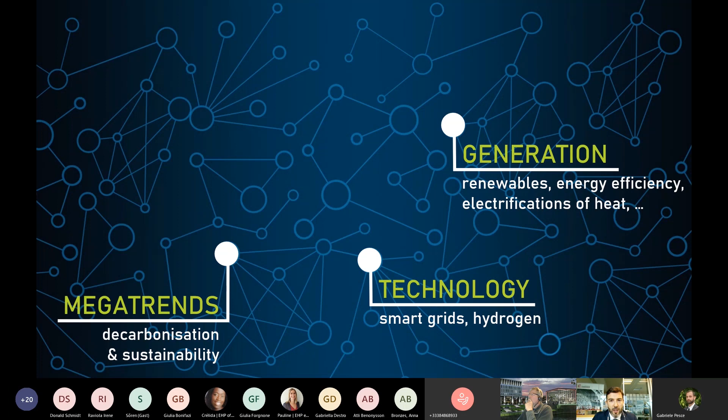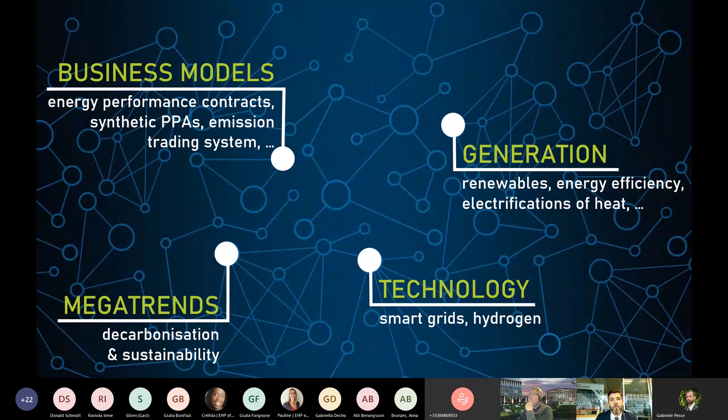We are also looking at changes in business models, which are now different from the past. We have energy performance contracts that are more and more common in the industry, with ESCO companies playing an important role. We are seeing synthetic PPAs. There is the emission trading system that is making energy efficiency attractive or needed in some cases. We are also seeing changes in finance and the way of funding projects around Europe. The European Green Deal is a big opportunity to receive funding from the European Union, but finance in general is changing in the energy sector. More and more funds and financial institutions are deciding to invest in the green economy, and so also in the green generation of power and heat. And the latest technologies like blockchain, fintech in general, are taking a role also in energy, for example with the tokenization of real assets related to the production of electricity or heat.

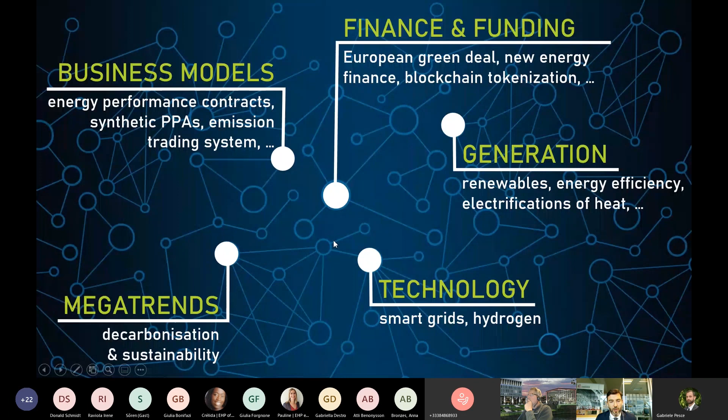In all this context, which is complicated, all these factors are in some way interrelated. We, as a technology provider, see technological innovation as a key enabler of all what is happening, so of this revolution in essence.

This situation is opening up huge opportunities for all the stakeholders in the sector: for the producers of energy, for the users, who are receiving more competitive energy in terms of cost but also additional benefits in terms of sustainability of the electricity and heat they are using, and also for the providers of technology.

Going directly into one of the topics of my presentation, I want to mention that if we look only at the potential market for large heat pumps, we see an addressable potential of 25 gigawatts, so 25,000 megawatts thermal of installable equipment, which is a huge amount only related to Europe.

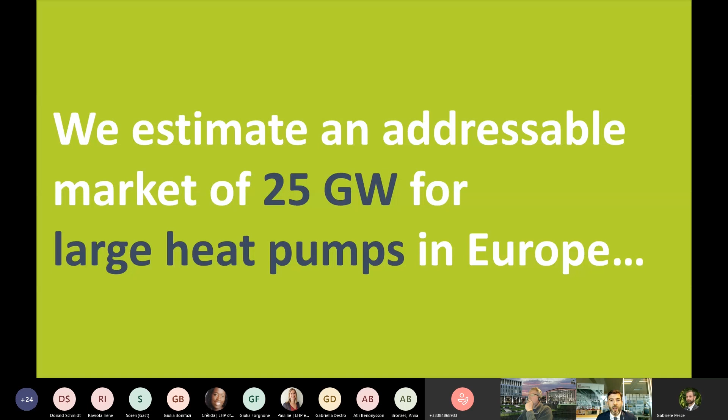As you can see, this potential is spread across many countries in Europe. There is a very interesting potential in Germany, but also Italy, Sweden, France, Finland, Austria, and Denmark, and then Portugal and Switzerland will be interested in the adoption of this new technology as a way to produce clean heat.

The interesting point is that as of today, only 5% of this important market is already exploited. This is just an example of how a new technology can respond to a need, the need to produce clean heat, and how many things we still have to do in the sector.

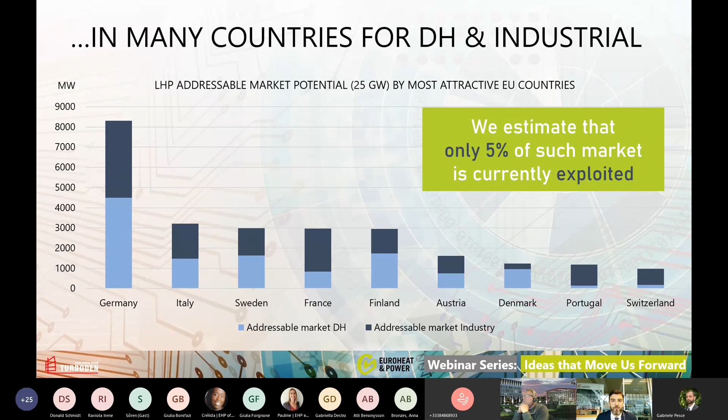Just a few words about who we are. Turboden is an Italian company, but it's a group company of Mitsubishi Heavy Industries from Japan.

2020 is our 40th birthday. This company has always been focused on the development of a single technology, which is the organic Rankine cycle system, which is a type of generation system for electricity and heat very suitable for distributed generation, which is also another trend, getting more and more importance in the latest years.

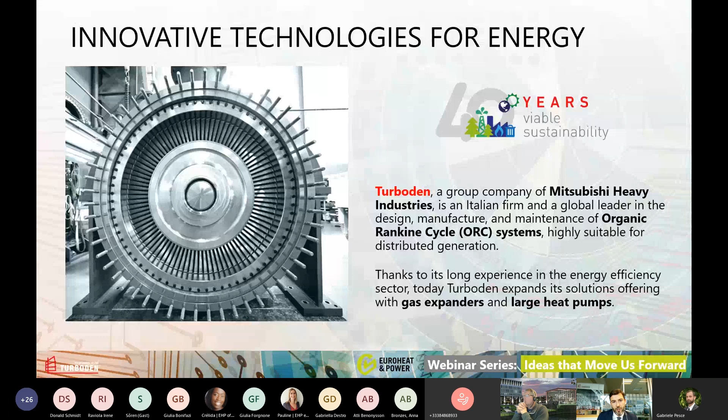In addition to the organic Rankine cycle, we recently started, in the last 3-4 years, to develop other products, including the large heat pumps that I mentioned before, and also the gas expanders that I will mention at the end of the presentation.

A few words about the organic Rankine cycle. The organic Rankine cycle system is basically a turbo generator where a Rankine cycle is implemented, but instead of using water, which is the typical means adopted for Rankine cycles, we are using different fluids. Specifically, we are using organic fluids, for example hydrocarbons or refrigerants.

The interesting point of this system is that it's very flexible and can provide some advantages compared to the traditional Rankine technology running on steam. One of the key points is that it can be used to recover heat also at low temperature, which is not possible with other technologies.

In terms of size, as I said, these systems are very suitable for distributed generation, so the size is fairly small. Our units are typically in the range from a few hundred kilowatts up to 40 megawatts per single unit, which is starting to be quite large, actually.

Large heat pumps: this is another technology that we are now proposing to the market, and it's a natural evolution of what we have been doing for the last 40 years, because if you look at the technology of a large heat pump, it is a kind of organic Rankine cycle reversed, where instead of a turbine expanding a fluid, you have a compressor compressing a fluid, and the fluids are similar. The heat pumps can be used to lift heat from a low-grade source to a higher-grade user, and the users can typically be district heating networks or industrial processes, by means of exploitation of electrical power.

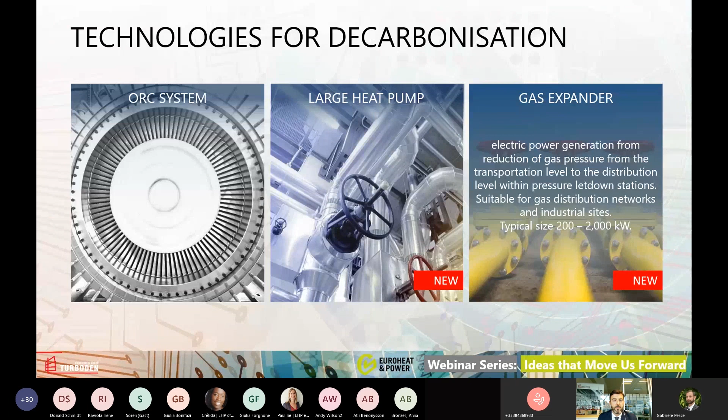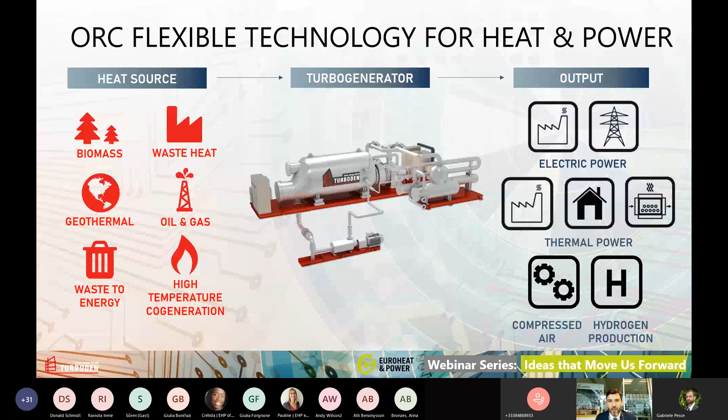As output, you can have different types of outputs. You can just produce electricity, or work in cogeneration mode, producing electricity and heat, which can be sent to different types of users in the form of water, hot water, or steam. You can even use the system to generate mechanical energy, for example in the form of compressed air, which is an application we've installed in some industrial sites. Or, as a new feature, you could use the system to run an electrolyzer to produce hydrogen, which may be a new frontier we'll develop more in the future.

Just to give you an idea, there are many ORC systems deployed around the world. This is a snapshot of the Turboden fleet. Most of our plants are running on biomass, with an ORC recovering the heat from combustion. We have about 450 megawatts installed, most of those in Europe.

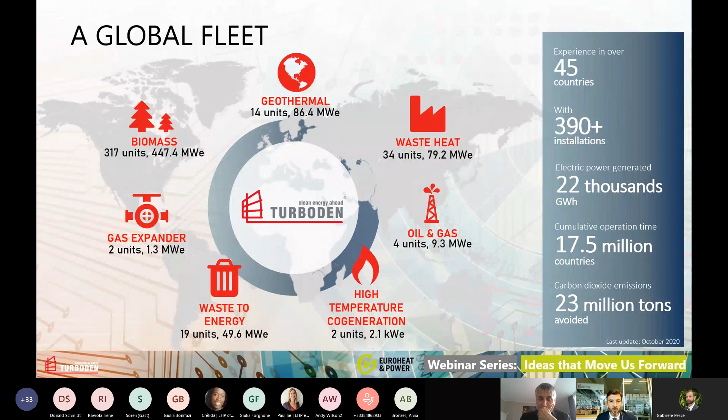Then we have geothermal, which is also quite interesting, where you can generate electricity or do cogeneration, as happens in Germany, for example. We have a waste heat recovery plant, roughly a bit less than 100 megawatts, in industrial processes including oil and gas. We have a couple of high temperature cogeneration systems already deployed, and other applications. Overall, we have roughly 400 plants around the world, producing roughly 22,000 gigawatt hours of clean electricity, so we are in some way contributing to the decarbonization of the world with our technology.

Just some examples, mainly related to district heating.

The first example is about Bavaria, the southern region of Germany, where we have a number of plants - 21 plants connected to district heating, most of them biomass plants. Some, as you can see on the left of the slide, are geothermal plants. We have 4 geothermal plants generating power and heat, connected to the local grid for electricity and to the local district heating for the heat. Then we have 2 plants just producing electricity. Average size of the plants is in the range of 4 or 5 megawatts. Overall, we produce 25 megawatts thermal with geothermal source and 27 megawatts electricity.

Most of these plants are owned by the local utilities, and as you can see on the right, many plants are deployed around the region. I think this is a very interesting example of integration of electricity and heat using new and clean technologies to provide electricity and heat to local communities.

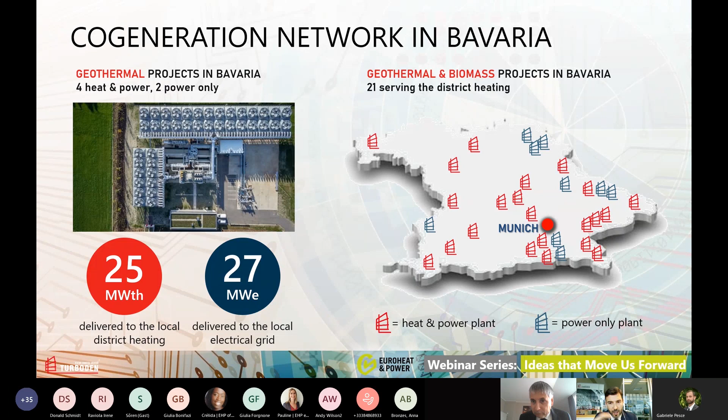This is another example of an interesting application, which in my opinion will become more and more popular in the future in Europe, but also outside Europe.

On the left, you see one of our references, which is basically an ORC unit producing roughly 1.2 megawatts, from the recovering of heat coming from the combustion of dried sludge, taken from a wastewater treatment system. This is an interesting way to increase the efficiency of water treatment systems, producing some electricity by using a residue, the dried sludge.

On the right, we see another example. This is not a reference, but just a case study, where instead of using an ORC to produce electricity, we are thinking about exploiting the residual heat coming out from the water treatment system with a heat pump in order to lift the heat and feed a district heating network.

Actually, this is not a new idea. There are a number of plants like this deployed around Europe. We saw statistics showing there are 54 plants producing 900 megawatts thermal. I think this may become a trend in the future, because it's a very good idea to exploit this waste heat in order to produce usable heat for local communities by means of a very efficient system like the large heat pump.

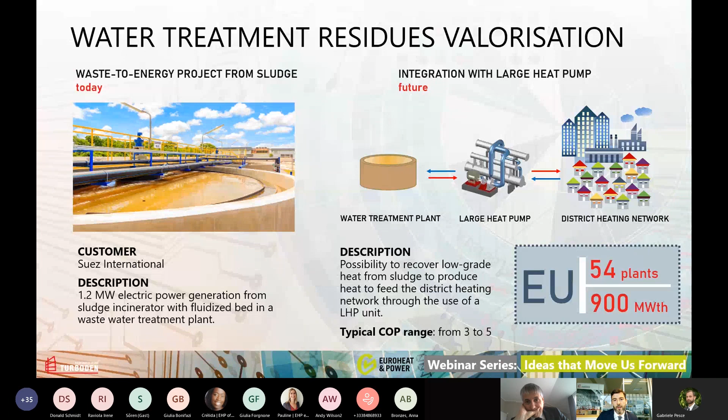This is another example of an organic rankine cycle system integrated with the district heating network. This is a waste incinerator burning municipal solid waste in Belgium, and this incinerator was meant to produce heat to feed the local district heating. As you can see here, there are some users indicated in the picture.

In parallel to the district heating, which was already in operation, we were asked by the owner of the incinerator to install an ORC system, which has been recovering excess heat in the district heating for almost 10 years. So when the load of the district heating is lower and excess heat is available from the operation of the incinerator, our ORC system recovers this heat in order to produce some electricity. Here we are working at high temperature for district heating, 180 degrees C, but low temperature for heat recovery, which is possible only thanks to the characteristics of the ORC system.

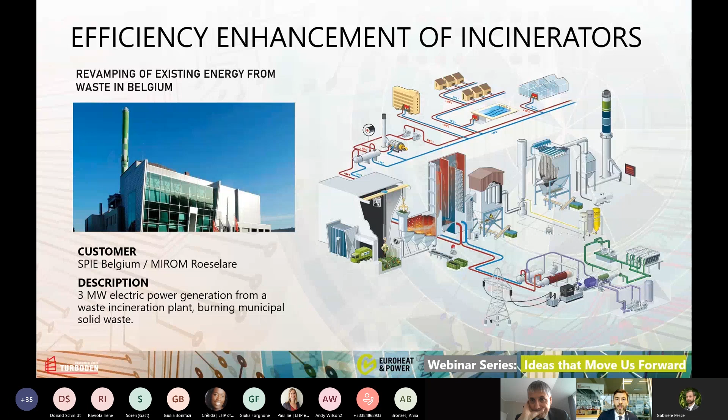Just to give an overall idea of how cogeneration serving district heating is spread in Europe, we put this chart where we show how our plants are distributed in the different countries. We see that we have a lot of plants in Germany and Italy, a good number in Austria, then we have UK, Poland, Latvia, and this is not exhaustive. We have also plants in other countries.

Overall, we have 274 CHP plants, 97% of those fed by biomass, and we are producing over 1.2 gigawatts thermal, of which roughly 700 are delivered to local district heatings. In addition to that, we are producing 300 megawatts of electricity. So I think that Europe is already on the right path towards decarbonization, and all the examples I'm giving are good examples that could be even further replicated.

Let's go to the next one, please, Gabriele.

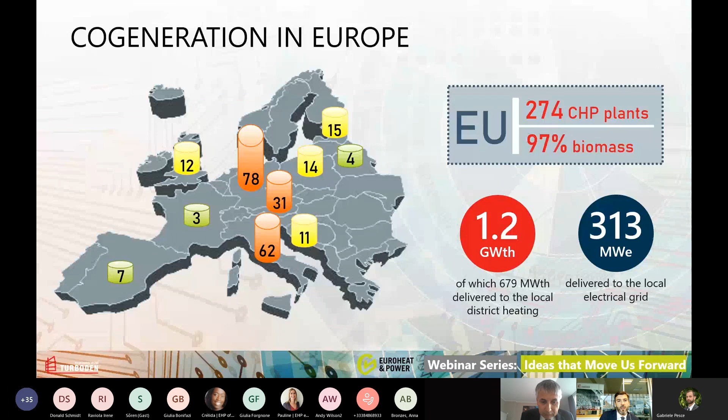Here we have a couple of examples of installations. This is a biomass plant in northern Italy on the border with Austria, in Dobbiaco. This plant is producing 1.5 megawatts electric and 8 megawatts thermal, which are sent to the local district heating.

It's an interesting example of a circular economy because the wood is taken from the local area, from the surrounding woods. It's burned to produce electricity and heat, which is used by the local communities. These are relatively small district heating systems serving local villages in the Alps area. I think it's a quite interesting example that can be easily replicated also because it's very sustainable. This plant has been successfully operating for 15 years, so it's a very long-lasting plant, which is still working and still providing benefits.

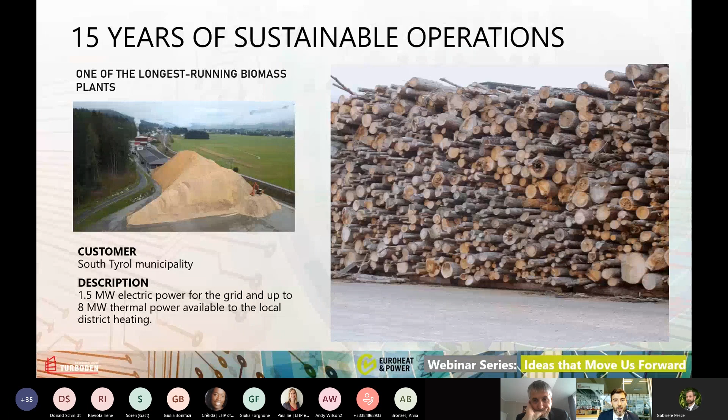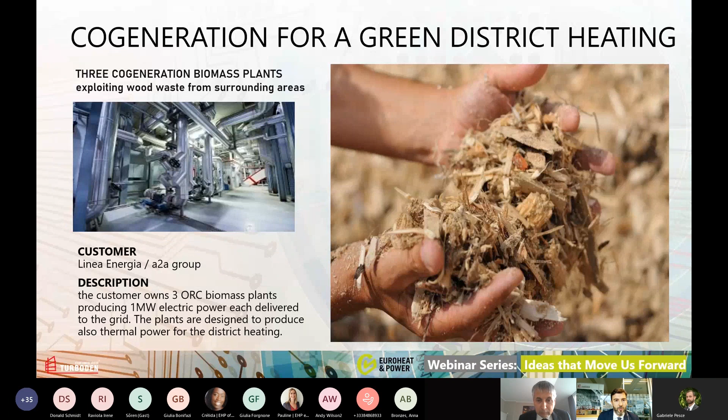Okay, some other examples. These are very similar to the one that I mentioned before. These are three plants in Lombardy, our region, owned by A2A, which is the company of Mr. Spadoni who will speak after me. We have three ORC biomass plants that are serving the local district heatings and are producing 1 megawatt of electricity each, very similar to the one that I mentioned before. Just to add additional examples of good working plants.

Can we go to the next one, please, Gabriele?

This is also another type of application that I think can be very interesting for the future decarbonization of heat and power in Europe. Here we are speaking about the steel sector, specifically a steelmaking company located in Brescia, Italy, our hometown, where the company wanted to exploit the excess heat they had, let's say the waste heat.

We started working with them about 4 or 5 years ago. The company, called Ori Martin, decided to install a heat recovery system recovering heat from the fumes of an electric arc furnace. This heat is then conveyed to the local district heating network, which is owned by A2A. When there is excess heat, because the demand of the district heating is lower than full load, the excess heat is sent to an ORC system, an organic Rankine cycle system, which produces electricity, 2.2 megawatts.

I think this is a very interesting example of a heavy CO2 emissions company like a steelmaking company, showing what they can do to become more sustainable and give benefits to the surrounding communities.

It's interesting to say that this same company is now thinking about implementing a new project where instead of an ORC to produce electricity, they want to use a large heat pump to exploit some residual lower temperature heat, around 50 to 60 degrees C, coming out from their process. This heat pump will lift the heat to feed the same district heating network already served by the heat recovery system mentioned before. This project is about to start, funded by one of the programs of the European Union, and I think it will be a very good example to be replicated in other industrial settings across Europe.

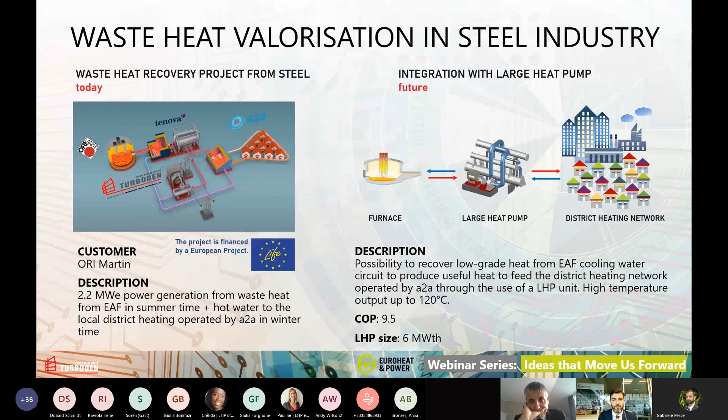A few notes about heat pumps. We believe our systems are very attractive for this type of installation because they are very efficient, with an optimal design of the COP. They are large scale, as I mentioned, they can provide high lift, and they can give high temperature output, which is very interesting because that's basically what's needed for high temperature users like industrial processes. We're speaking about temperatures up to 200 degrees C.

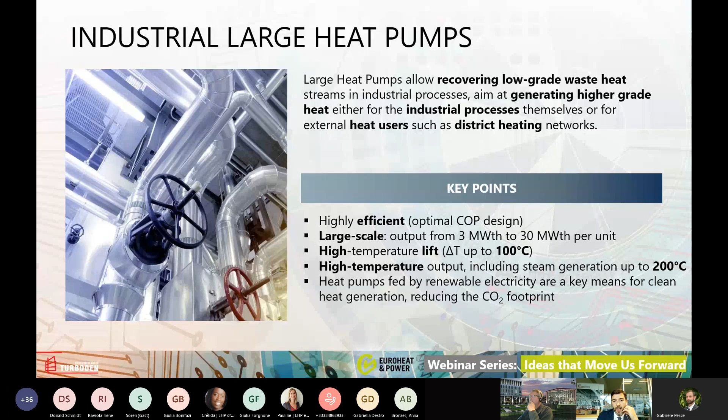In our opinion, it is clear that heat pumps will play a pivotal role in the future decarbonization of heat, because it's one of the few systems you can use to produce clean heat while reducing the overall CO2 footprint, exploiting clean electricity.

Can you go to the next one, please?

This is the general concept of heat pumps. On the left, there's a list of possible heat sources you can use. We have what we call free sources, like wastewater or river water. We also have some sources we call income generators, because this is heat, for example in industrial processes, that needs to be cooled down, spending resources, money, and electricity. Instead of cooling it down with cooling towers, you can use a heat pump to cool it down, and the same heat pump can give heat at a higher temperature to users, such as district heating networks.

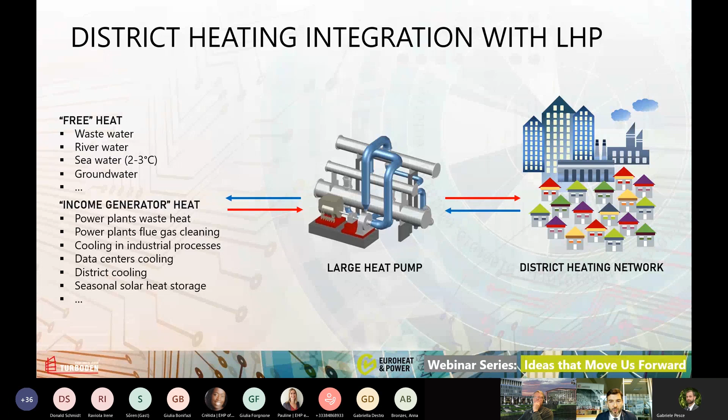This is an example from Germany, a heat pump designed to exploit a geothermal resource at 40 degrees C, as you can see on the bottom left of the chart, aimed at giving 90 degrees C water to the local district heating network. In this case, we're integrating the heat pump with a cogeneration gas engine, so this will be a hybrid system burning natural gas but also using a natural resource like geothermal. This setting makes sense when electricity still has too high a cost to make the business case of the heat pump successful on its own. By coupling the heat pump with the gas engine, using gas instead of electricity to run the heat pump, the business case can become interesting.

Looking at it from an energetic standpoint, you're basically taking 95 units of heat from geothermal plus 100 units from natural gas, and producing 180 units for the district heating. This means the 95 units from geothermal transform into about 80 additional units on top of what you're producing with gas, but at a higher temperature, so this is more valuable heat.

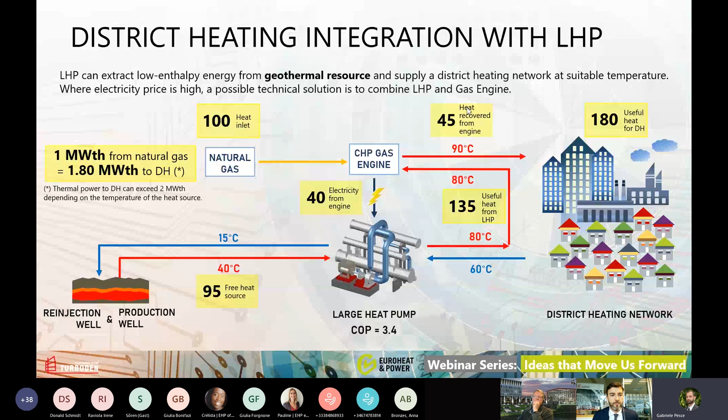Next one, please, Gabriele. Yeah, sorry, we had a problem. Andrea, Lorenzo has arrived, so I can kindly ask you to speed up a little bit so he can have time for his presentation. I think we have a couple of minutes more. Is it the right slide? No, next one, please. Can you see it? Not yet. Oh sorry, today is very unlucky. Just a second. Okay.

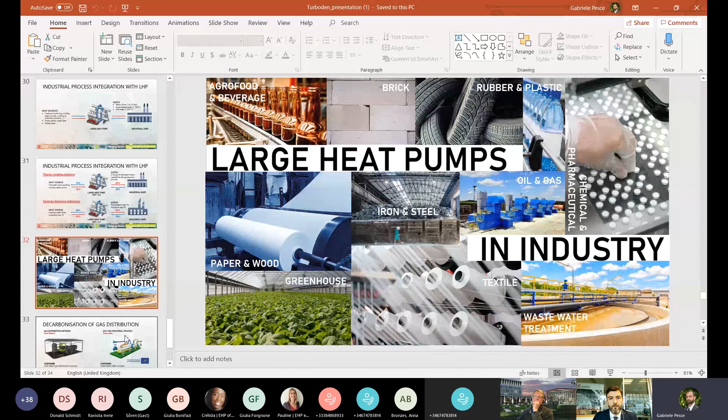Just to conclude on the heat pumps, I wanted to propose a couple of examples of applications in industrial sectors. On the top, we have a plastic making industry where the heat pump is using heat coming at 85 degrees C from the process and lifting it up to be used again in the process in the form of steam. At the bottom is another example, a chemical industry in Finland, where they are thinking about using 80 degrees C water coming out from the process and lifting it up to 110 degrees to provide heat to surrounding industrial users.

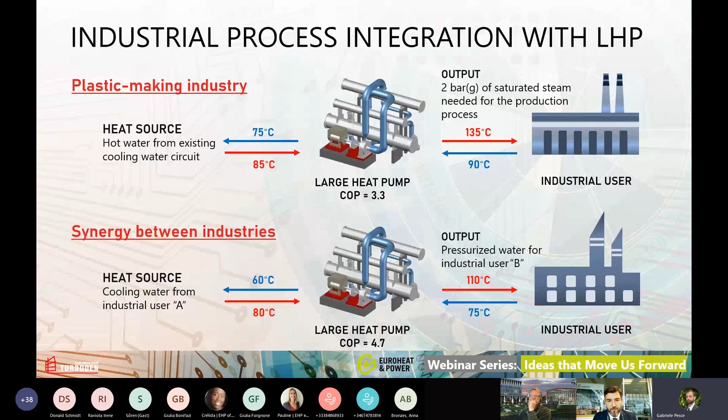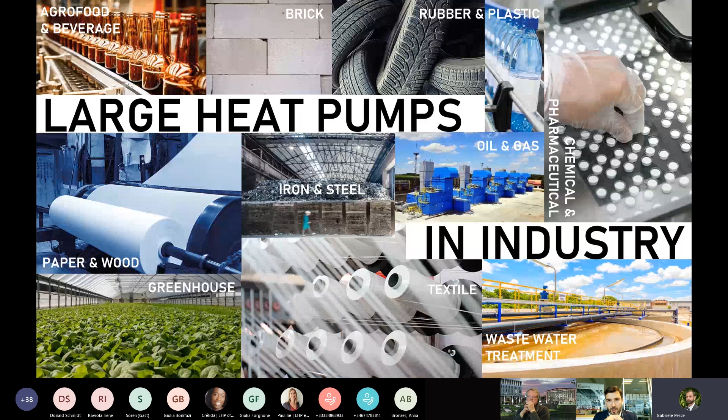This is just to say that heat pumps can have many applications in many industrial sectors. I already mentioned some, and you can see in these slides other mentions, but it's not exhaustive. We range from food and beverage to greenhouses, pulp and paper, iron, wastewater, textile, and also others.

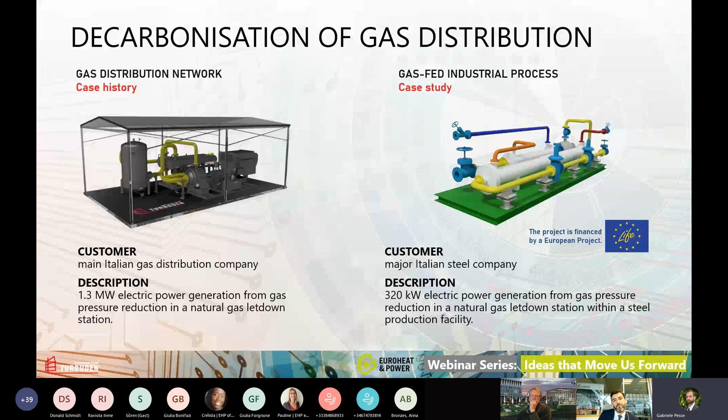So I'm done with my presentation. I'm sorry if it took a bit too long. Just to conclude, as a technology provider, we want to renew our commitment to provide more and more cutting-edge technologies to the market in order to enable this green revolution toward a decarbonized and more sustainable world. Thanks again for your attention, and I leave the floor to Gabriele and Mr. Spadoni.

Thank you, Andrea. It was really a very interesting presentation. You gave us a very inspiring overview of the latest innovations we can have from the supply side for district heating and so on. I know we have some questions, but I would like to give the floor immediately to the second panelist. Don't worry, you will have the opportunity to pose your question at the end of the second presentation.

So I would like to kindly ask Lorenzo Spadoni, the president of AIRU, the Italian Association of Urban Heating, to switch on his camera. I think it should be connected. Lorenzo? Yes, Gabriele, okay, thank you, I am connected, I hope you can hear me. I can hear you very well. Welcome again, we know he had a professional impediment but fortunately he managed to be here. He's going to present a very interesting presentation about the potential of district heating in Italy, a study made by Politecnico di Milano and Politecnico di Torino, if I'm not wrong. So I would immediately give the floor to Lorenzo, enjoy the presentation. Please, Lorenzo. Okay, thank you.

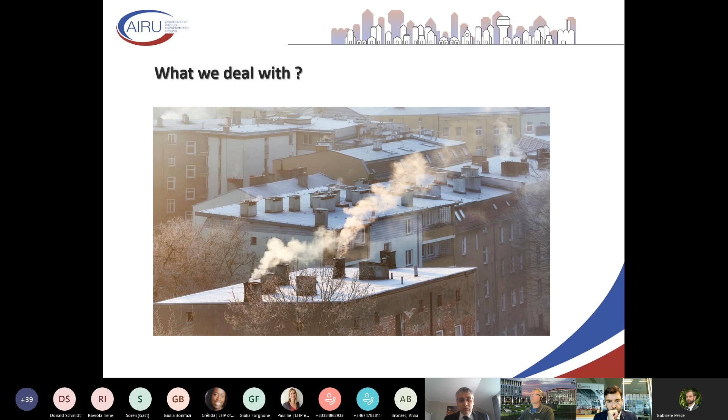So what we deal with is the heating and cooling sector. It's not a very green sector, it's very fossil-based, but it is very energy demanding, responsible for half of primary energy consumption in the EU. 70% of this demand is satisfied by fossil fuels still today, and 80% of this demand is coming from cities. So we have a very important opportunity to improve the heating and cooling of our cities. What we propose for this is efficient district heating.

I received a message that someone is not able to see the presentation, but I can see it, Lorenzo. I don't know if someone else is not seeing it, please write it in the chat. A lot of people cannot see the presentation, I don't know why. Can you try to interrupt the sharing and re-share again? Okay, now it's coming, it's coming. Yes, I can see the presentation now. Okay, I come back to the point.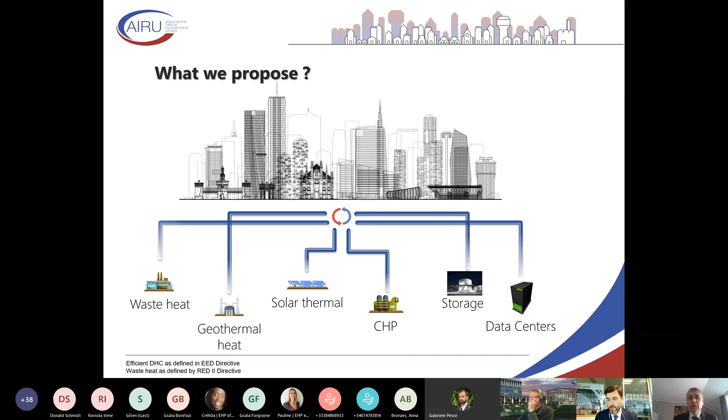What we propose to improve the heating sector in our cities is efficient district heating and cooling, based on waste heat, on renewables, on high efficiency CHP, which makes use of heat storages and also of digitalization of the operation.

This is the today dimension of the district heating sector in Italy. You can see the distribution of the networks. We have more than 300 networks, but most of them are very small, sometimes concentrated in the mountain regions, in the Alps. But we also have three quite big systems in the cities of Turin, Milan, and Brescia. We reached an estimation of 1.3 million flats, and we represent 3% of the total heat demand of the country.

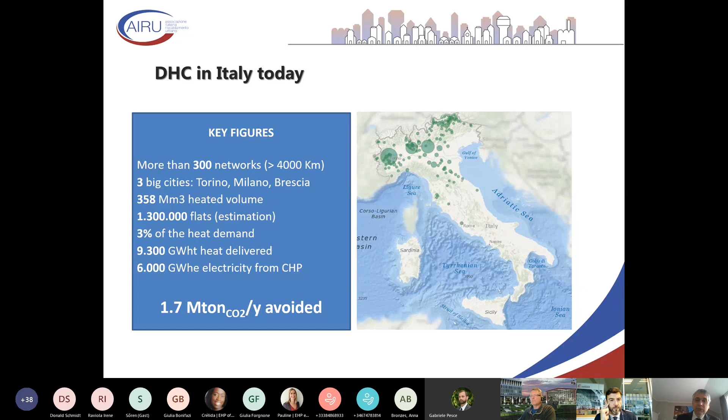For historical and climate reasons, most of the systems are concentrated in the northern region. We delivered 9.3 terawatt-hours of heat every year, and we could generate 6 terawatt-hours of electricity from CHP plants, and we save 1.7 million tons of CO2 per year. This is the key figure today.

But we are a little bit worried about the future development. Here you can see the historical development of district heating in Italy, starting from 1972. It seems quite a quick increase, but if you look at the last 4 or 5 years, you can see that the increase year by year is slowing down, and so the sector is slowing down. So the question we have is if there is a future for district heating in Italy, and what could this future be.

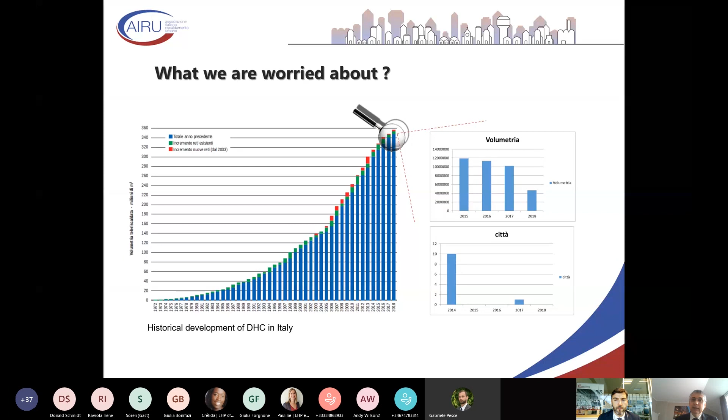One could ask why we are slowing down. The reason is that if you see this slowdown, and at the same time look at the recent legislative developments in Italy, you find that there have been several modifications of rules in recent years that have not been improving district heating development and the realization of investments. That is the main point we are raising to the attention of our policy makers. So to contribute to the debate around the future of district heating in Italy, we asked the Politecnico of Milan and Politecnico of Turin to help.

We asked the Politecnico of Milan and the Politecnico of Turin, which are the two main technical universities in Italy, to make an evaluation of the increasing potential of district heating across the whole country, especially district heating based on the use of waste heat and renewables.

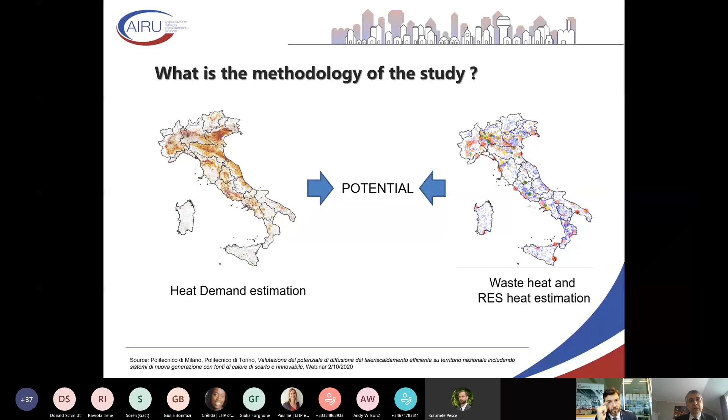They started from the heat demand estimation and the geographical reference mapping of the heat demand. At the same time, they made the estimation and mapping of waste heat sources and renewable heat sources available in the country, and they matched this information to calculate the potential, considering both technical feasibility and economical feasibility.

The idea is that we can talk about a minimum cost scenario, which means they calculated the district heating that can be realized at a cost which is equivalent, for the customer, to the cost of possible alternatives.

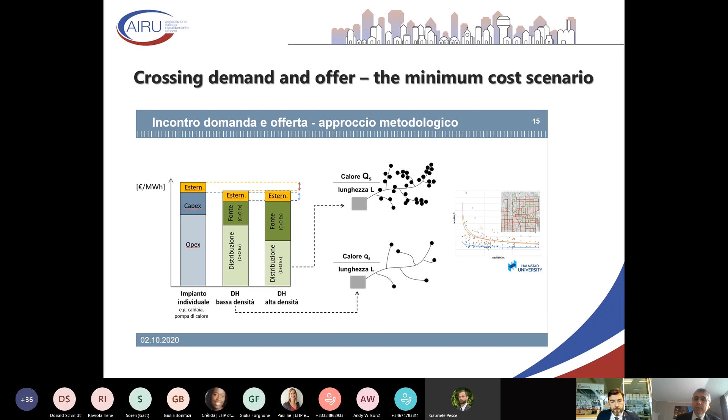They made a sophisticated simulation to calculate the cost of distribution networks and all of the other costs involved in district heating realization, and they compare this cost with the cost of possible alternatives for customers in every single piece of ground of the mapping. They have a collaboration with Halmstad University and the Heat Roadmap Europe project. The results show we have around 300 terawatt-hours of heat demand in Italy for heating and cooling purposes. We have something more than 114 terawatt-hours that could be feasible, for which we have technical feasibility, and 38 terawatt-hours in the minimum cost scenario.

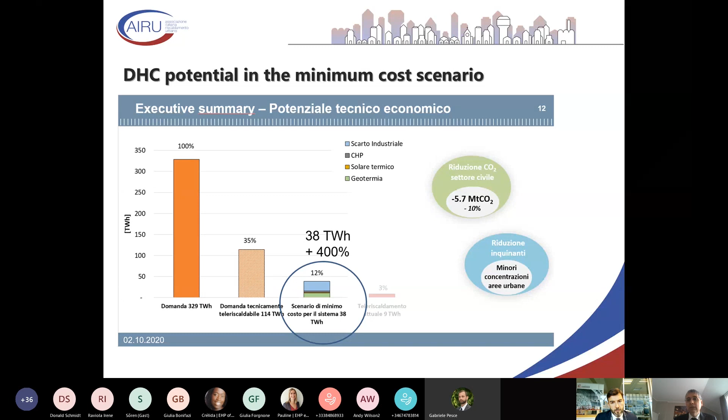38 terawatt-hours is more than 4 times the current dimension of the district heating sector in Italy. So it is, from our point of view, a quite huge potential, and probably this figure is a little underestimated due to some hypotheses the universities made in their calculation, just to be on the safe side. But it is a very huge potential, which can contribute to increase to 5.7 megatons per year the CO2 savings, and that could also contribute to air quality improvement, especially in the northern plain. The effect is equivalent to eliminating 4 million cars from circulation.

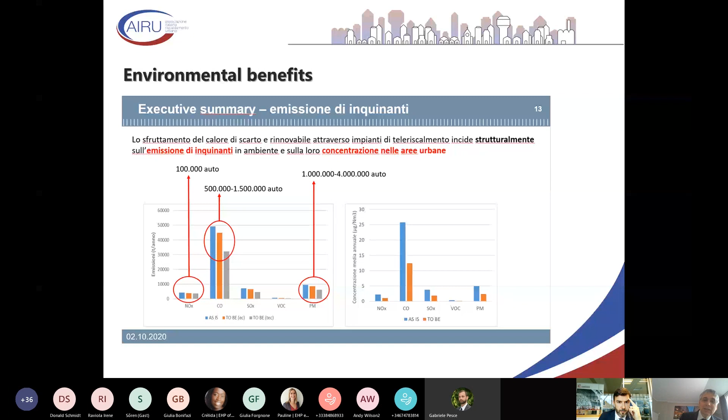So this is a huge point. There is a potential, but at the same time you see that the sector is slowing down. So why is the sector slowing down its speed of development while we have this huge potential? The point is that to deploy this potential, we need to invest and make great investments in infrastructure. We need to expand the networks, and the payback time of this investment is quite long. So we need some conditions for this.

First of all, we need stable policy conditions. We need district heating to be fully included in energy planning at the national and local level. These two conditions have not been realized in recent years, and this is the main problem that we have. Of course, we also need to increase the awareness of citizens about this kind of solution, district heating, which is a simple and sustainable solution. The awareness of citizens has to be increased in this sense.

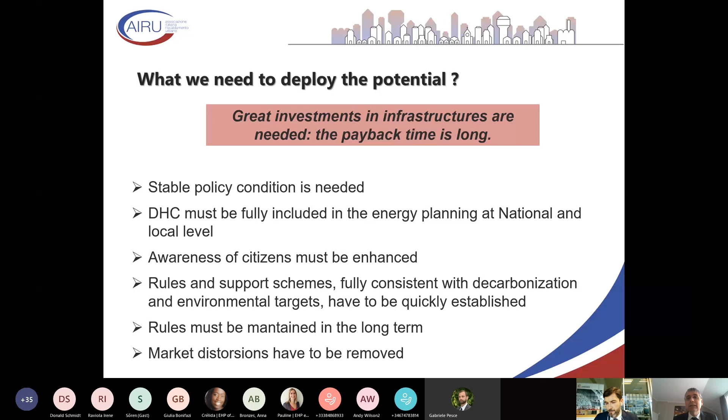Very importantly, these rules must be maintained in the long term, because the payback time of these investments is long. So we are talking to and pushing our policymakers to establish these rules, and to establish a coherent policy about district heating. We hope that the results of this study could help our policymakers in taking fact-based decisions. So I can stop here for the moment, and if there are some questions, I am available.